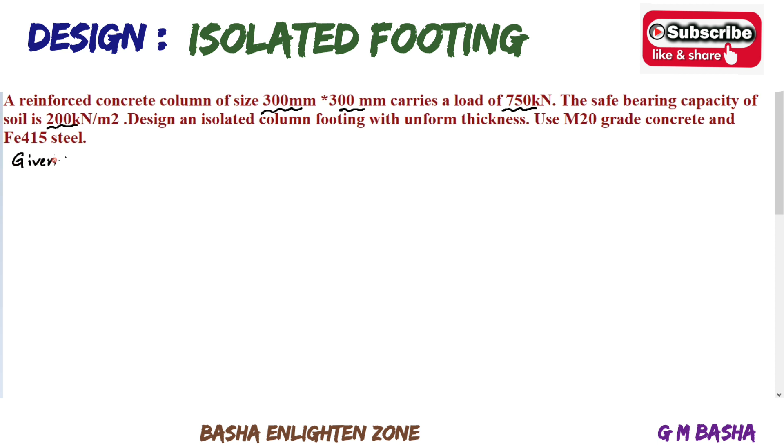Let's write down the given data. They are asking us to design an isolated column footing. What is an isolated footing? It is a footing provided under each column independently. A combined footing, on the other hand, supports two or more columns. But here we are going to design an isolated column footing.

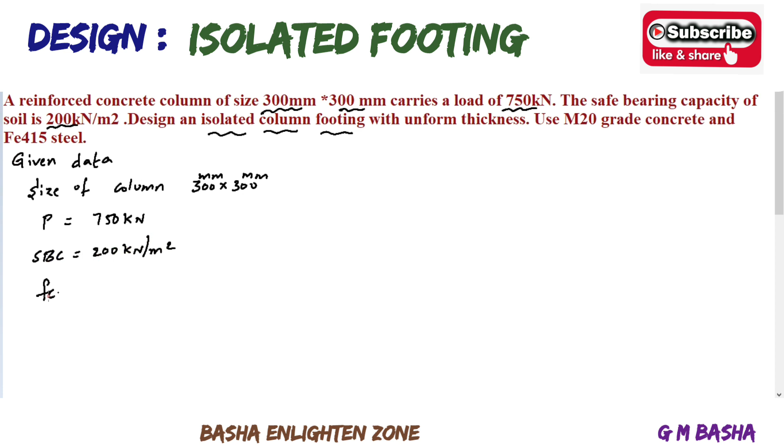So the given data: the size of the column is 300 by 300 mm, both in mm. It carries a load P equal to 750 kilonewton, and SBC of soil equal to 200 kilonewton per meter square. We need to design an isolated footing with given materials: FCK equal to 20 newton per mm square, and Fy equal to 415 steel.

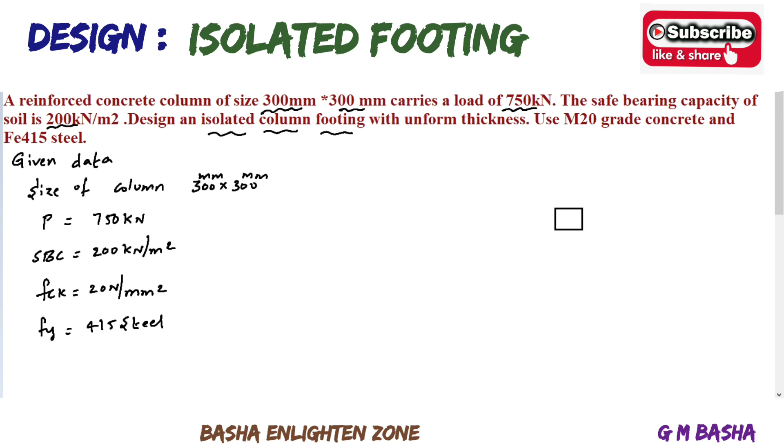So here they have given the size of the column like this. Both sides it will be 300 by 300. Here it will be 300, and here it will be 300. For that we have to design the footing.

Okay, we have to design this footing. So this is the top view. And if I talk about the side view, it will be like this.

So this is the column, this is the size of the footing, but still we don't know the size of the footing. The given data is only for the column, and the column will bear an axial load of around 750 kilonewton. So for that we have to find the size of the footing.

First, let's find the size of the footing. Take down the size of the footing. For finding the size of the footing, first take the self weight of the footing. The load of the column will be given, P equal to 750 kilonewton. Then there is the self weight of this footing.

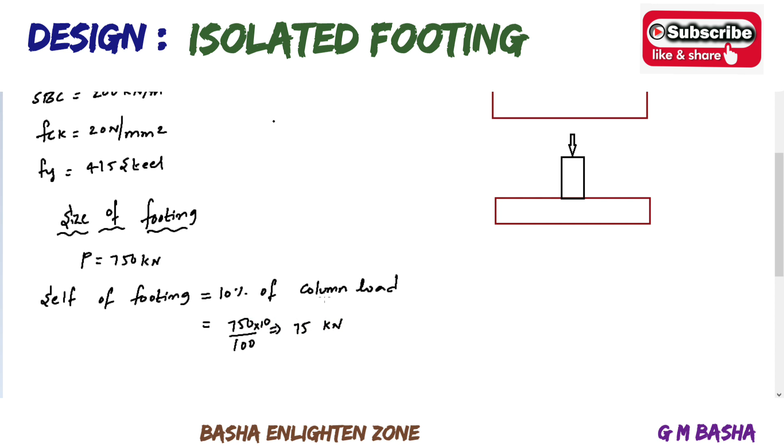So what is the overall load? The column load plus self weight of the footing equals the total load. That will be 750 plus 75, which is 825 kilonewton.

Then find the area of the footing. Area of footing equals total load divided by SBC of soil. That will be 825 divided by SBC of soil, given as 200 kilonewton per meter square. So that equals 4.125 meters square.

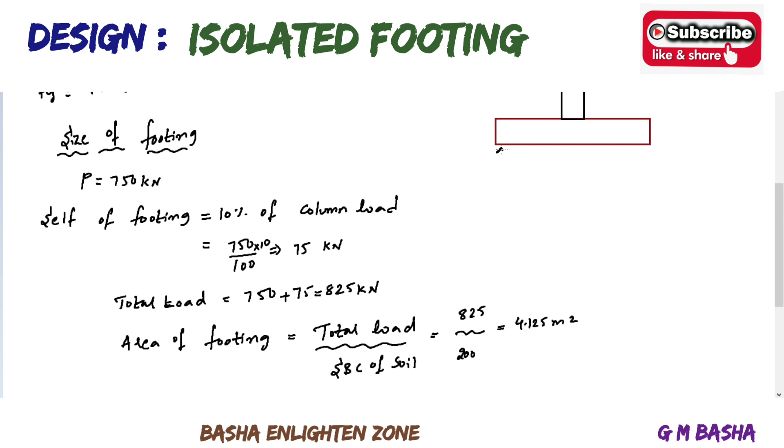Generally the SBC is in terms of upward pressure like this, and it is denoted with some symbol QU, Q, like that.

After finding the area of the footing, since this is in terms of square meters, we divide this footing in terms of length and width. For that, I will take the square root of 4.125. So area of the footing equals L into B, which equals 4.125.

Since both sides we are keeping the same dimensions, it will be around B equal to 2.03. Therefore we adopt approximately 2.1.

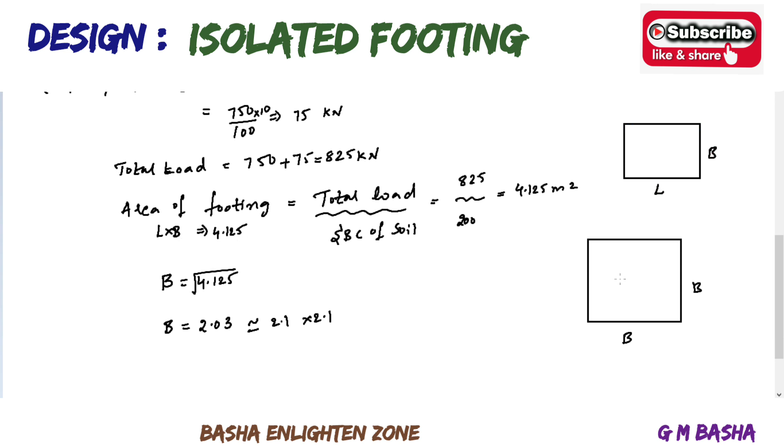So first find the area of the footing. Here it is not mentioned which type of footing you have to design. For example, if they ask you to go for a square footing, then you can choose dimensions as B square equal to the area, both sides same, B into B, like how I am taking here. If it's a rectangular footing, you can take L into B like this. Generally, area equals length into breadth, which is 4.125. Here the column is square, and in the question they mentioned 300 by 300.

It is always convenient to prefer square footing if it is not mentioned in the question. But if it is mentioned in the question, you can go for rectangular footing, changing the dimensions to suit the area. For example, length might be around 1.9 or 1.8 or 2.2 - different length and breadth for a rectangle. The entire procedure remains same, but we change the dimensions according to square or rectangle. Since the question didn't mention anything, for this square column I am preferring square footing only. So I am taking B into B, and the footing size will be 2100 mm on both lengthwise and breadthwise. So our size of footing will be 2100 by 2100.

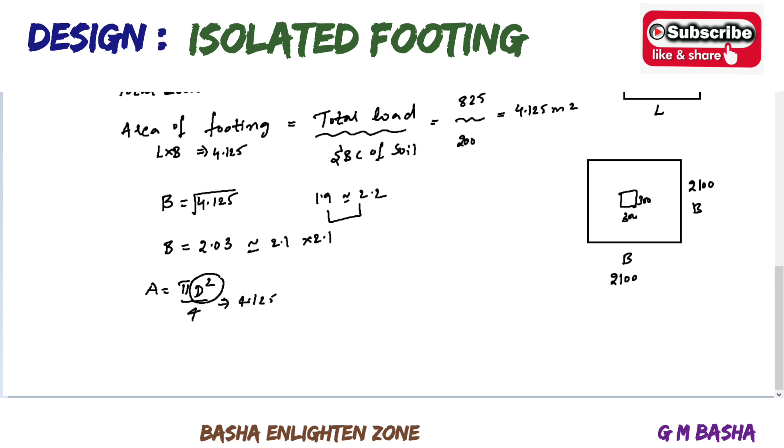Suppose if they are asking about circular footing, then the area of the circular footing will be equal to pi d square by 4. You have to find the diameter based on this footing area, and design the circular footing accordingly. So if it is rectangular, choose length into breadth. If it is square, take B equal to this value. And if it is circular, take pi d square by 4 equal to that value. So here you will get the diameter.

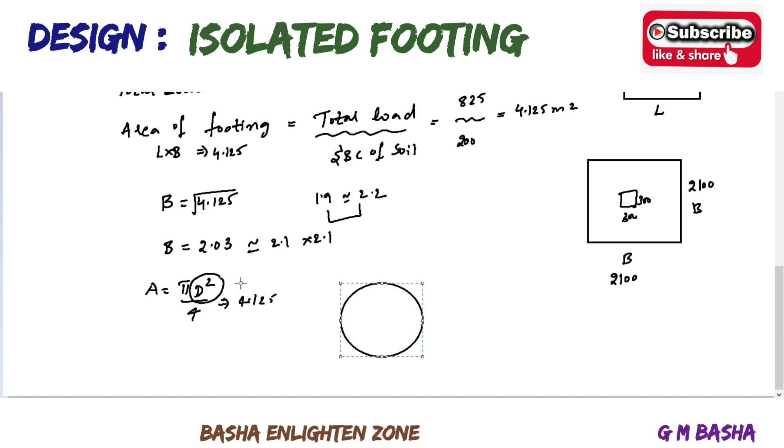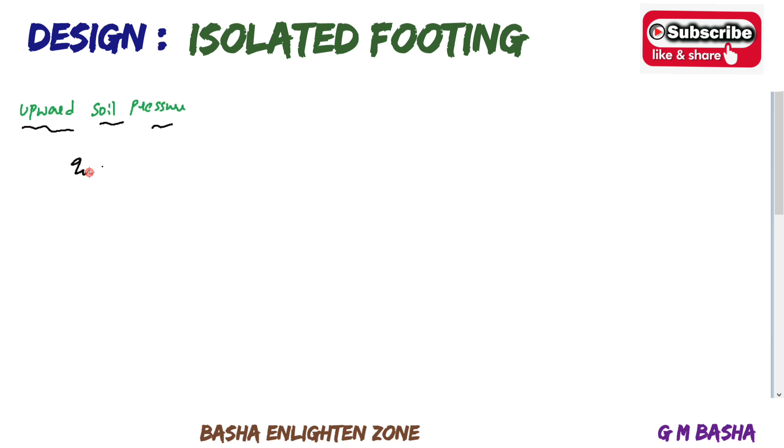Next step is upward soil pressure. What is the formula for upward soil pressure? Soil pressure at ultimate load - we have to find QU equal to PU by area of footing, taken in terms of factored load. If you want factored load, the given load is 750, and factored means add 1.5 times extra. What about area of the footing? We already adopted the size as 2.1 by 2.1 - length into breadth. If you simplify, you get around 255 kilonewton per meter square, which is 0.255 Newton per mm square. This is the upward soil pressure at ultimate load.

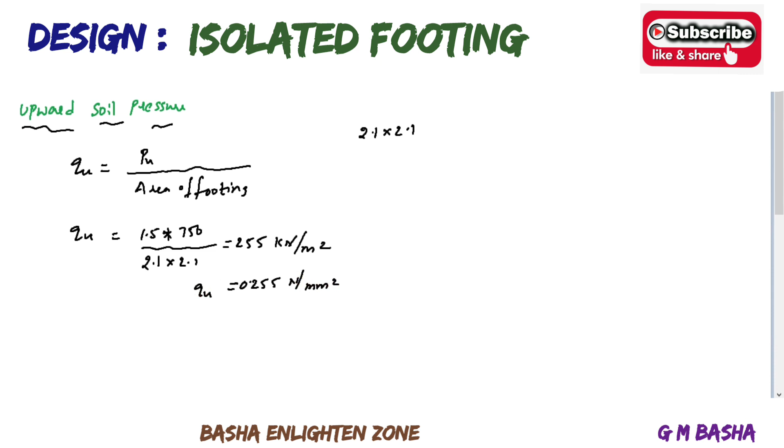Next step is to find the depth of footing from bending moment considerations. What is the formula for finding depth? Generally we choose each time Mu equal to 0.138 fck b into d square. We have to find the required depth based on this formula. For knowing this, we need the Mu value here. So for finding Mu, what is the procedure?

This is the footing. The size of the footing is around 2100 mm lengthwise and breadthwise, which is square footing. The size of the column is 300 by 300 mm. For finding the depth, the critical section is always at the face of the column. The face of the column is this one from here - this is the face of the column on all four sides, equal because of the square column and square footing.

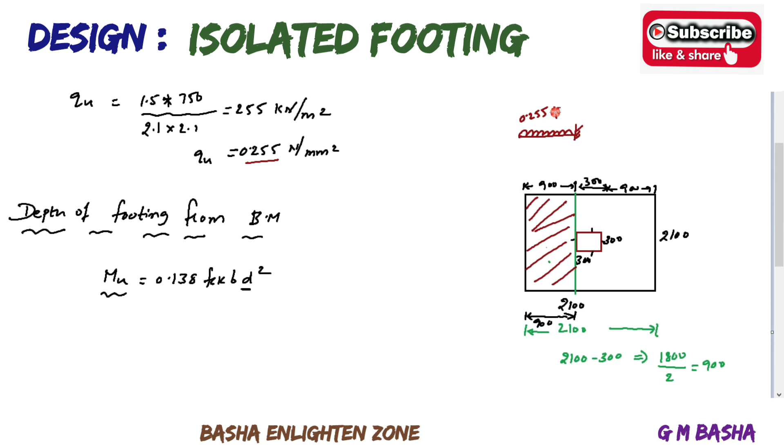So the soil pressure acting here will be QU, that is 0.255, and up to what length it will be in the total span of 2100. So this is the load acting on this end in the shaded area. At what length? It will be around 900.

So what is the formula for finding bending moment? For example, for a simply supported beam, if a UDL is acting, the value will be WL square by 8. But for a cantilever position, if a UDL is acting, the moment will be WL square by 2. What is W here? Soil pressure into its total breadth.

Here L will be 900, divided square by 2. So simplify this one, you will get bending moment will be around 216.88 into 10 to the power of 6 Newton mm.

So what about shear force? We know the condition for shear force also, which is W into L for cantilever.

Okay, here we have to find this depth. For finding the depth, substitute this moment value here, 216.88 into 10 to the power of 6, and remaining value will be equal to 0.138. FCK will be equal to 20.

What is the B value here? In the formula, in place of this B, you can take down capital B, which is the total B value, that is from here to here. So lengthwise we are taking 900, breadthwise taking 2100. So take down this one as the B value, that is 2100.

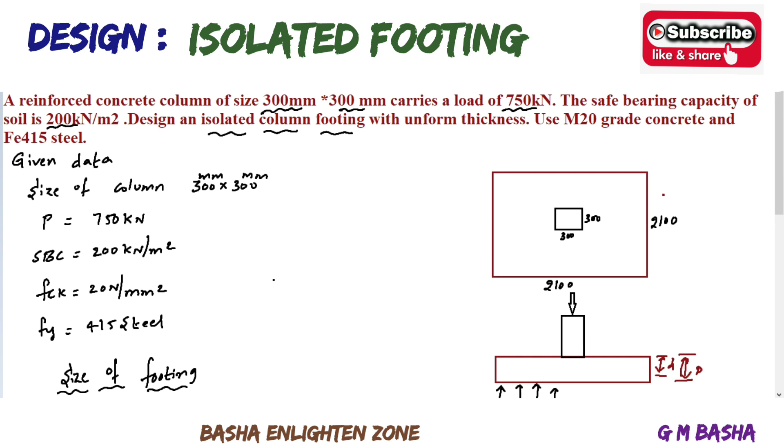So the depth required for footing will be, the obtained value here is 200. One more thing you have to remember is, to resist shear in footings, whatever depth is obtained for bending here, it will be taken as twice. For example, you get depth around 200 mm, means we can take down the value as twice, because depth required to resist shear in footings is much higher than required for bending.

So you have to assume the depth will be twice the bending moment consideration. So each and every time, even for rectangular footings or square footings, if the depth will be some 250 means automatically you can take down twice whatever the depth adopted here, obtained here. So your adopted depth will be equal to 400 mm, which is effective depth here.

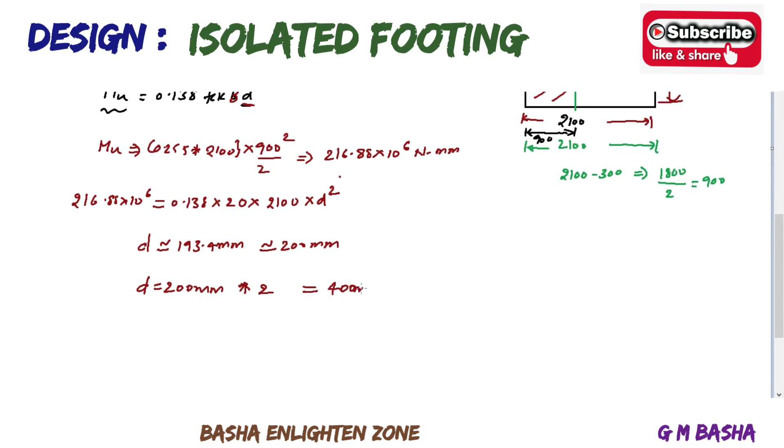Again for overall depth, choose 50 mm effective cover extra and adopt 450 mm as the higher value. So therefore your overall depth will be equal to 450 mm and effective depth will be equal to 400 mm. Then provide the reinforcement for this one. So next step is reinforcement details.

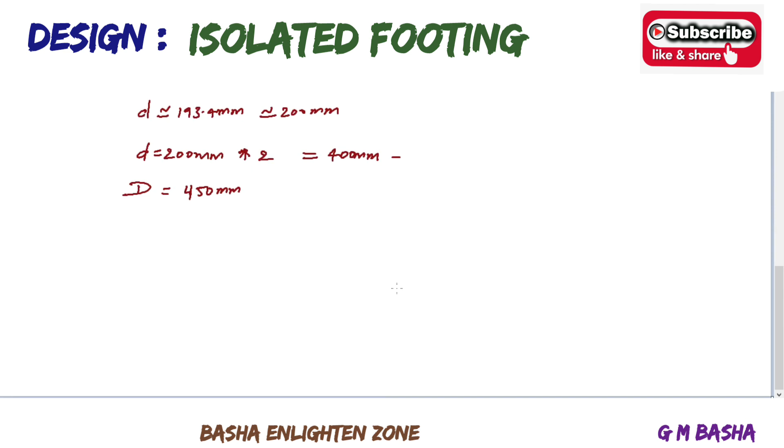So generally for the reinforcement we are using only one formula, which was here, page number 96.

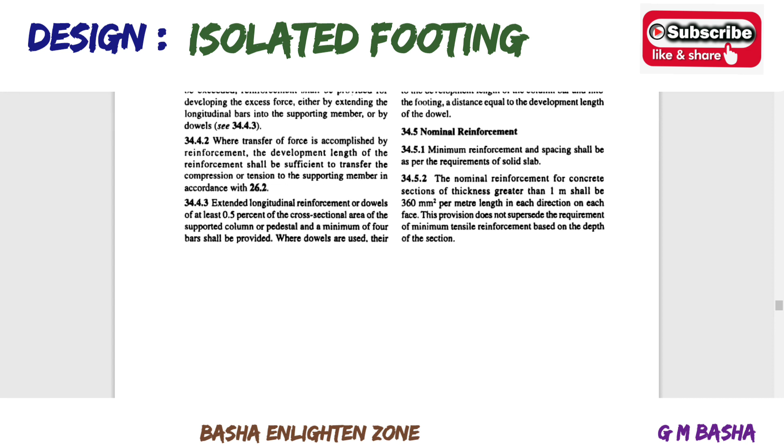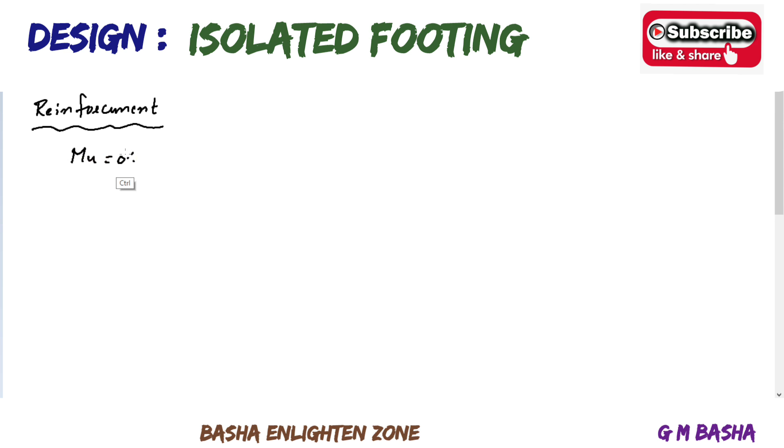Mu will be equal to 0.87 Fy AST D into 1 minus Fy AST by FCK capital B into D. So substitute all the values obtained here: 0.87 into 415 into area of the steel. Depth taken here is 400, and again 1 minus 415 into area of the steel. FCK will be 20, 2100 into effective depth will be equal to 400.

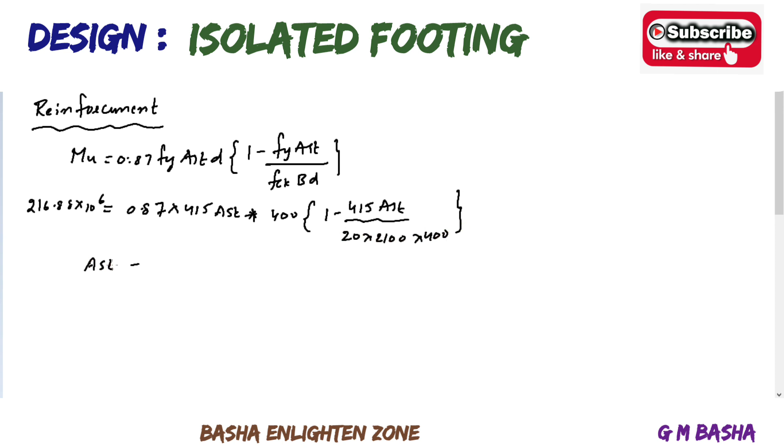So simplify, you will get area of the steel. Just a general procedure for all these things. You will get area of the steel will be 1562 mm square.

So like slabs, we have to provide spacing here also. Spacing will be equal to small AST into B by capital AST. So check the formula. The spacing formula here for footings will be small AST into B by capital AST.

We know the minimum dia bar used for footings will be 12. So I will check with the same dia only. Pi 12 square by 4 into B value will be 2100, divided by this capital AST. So the AST will be 1562, which is obtained here. If you simplify, your spacing value will be 152 mm.

So approximately it will be equal to 150 mm. Adopt the spacing to the lesser rounded value. So here provide 12 dia bars at 150 mm spacing center to center.

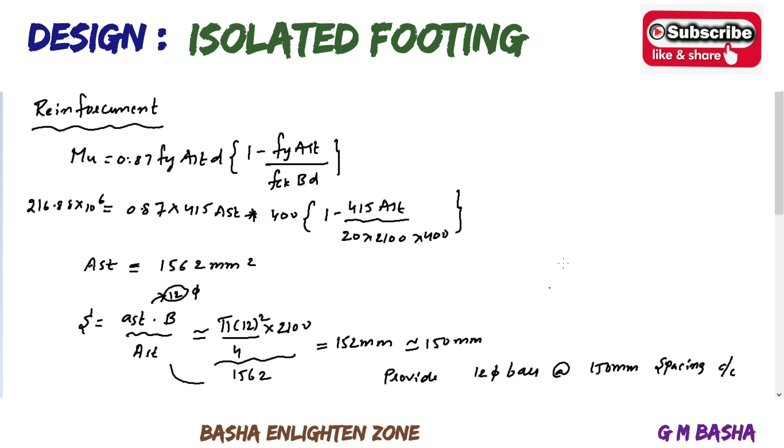So this is the main reinforcement. We have to provide the spacing in both directions. So after finding the reinforcement, check for one-way shear. For footing, we have to check both one-way shear and two-way shear also.

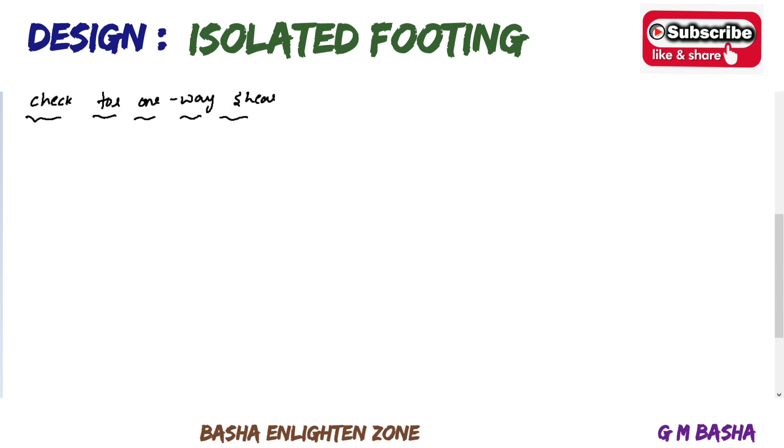So this is the footing and this is the column. We take the critical section for finding the depth at the face of the column, which is at a distance of 900 mm from here to here. The overall length is 2100 mm, so here also it will be 2100 mm.

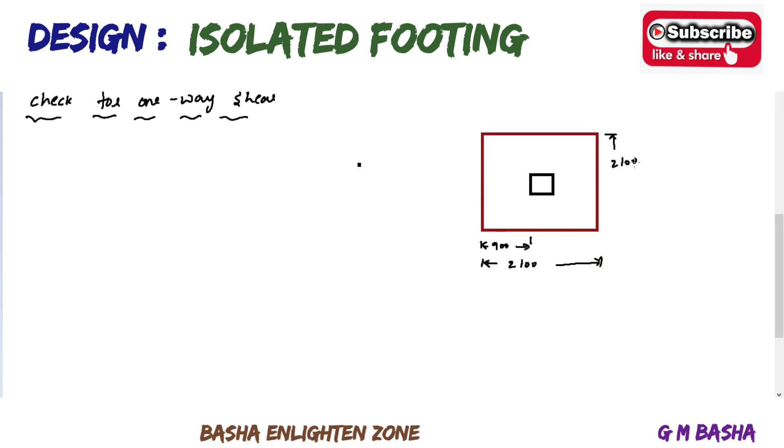So we know all these values. The column will be around 300 by 300 only. But each and every time we have to remember one thing: for finding the critical section to check for one way shear, the critical section is always at a distance of D from the face of the column. What is D here? The D value will be equal to 400 mm, what we adopted. So in this 900, again we have to remove this 400. The remaining value will be 900 minus 400, which is 500. Means the critical section is at a distance of 500 from the face of the column.

Again I will mark with the shaded area here. So always remember this: the critical section is at a distance of D for one way shear. So I will mark with the shaded area. How much is its length? Its length will be around 500.

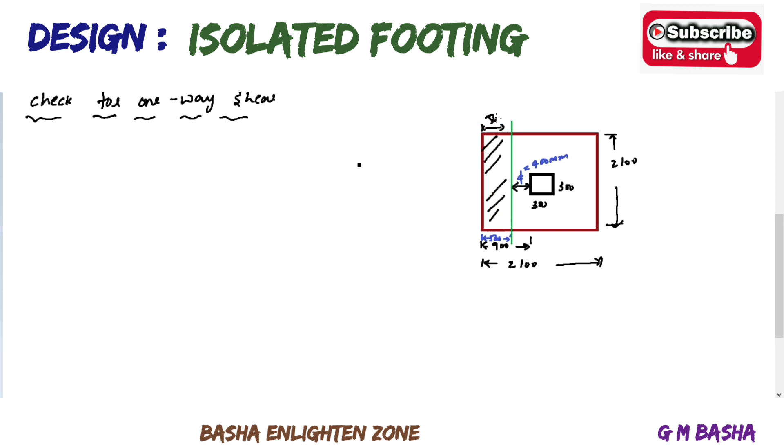Then, if your tau c value is greater than tau v, one way shear is also on the safe side. So first check the tau v value. What is the formula for tau v? We know this formula from the start itself. Tau v will be equal to Vu by capital B into D, generally it will be small b into D. So here capital B will be 2100.

Then what about Vu? Vu will be the shear which is Wu into L. What is Wu here? Already we know Wu will be equal to 0.255 into its overall length, breadth 2100. And L is here the critical section which is acting, 500. So I am telling like this: this is Wu into 2100, and this distance is 500. That is WL is equal to, sorry, this value ends up to here, W into L. So the value will be 267750 newtons. After obtaining this Vu, check with the formula.

That one will be equal to 267750 by capital B value will be 2100, into small d value will be 400. So it will be 0.318 Newton per mm square. So your tau v value will be equal to 0.318 Newton per mm square.

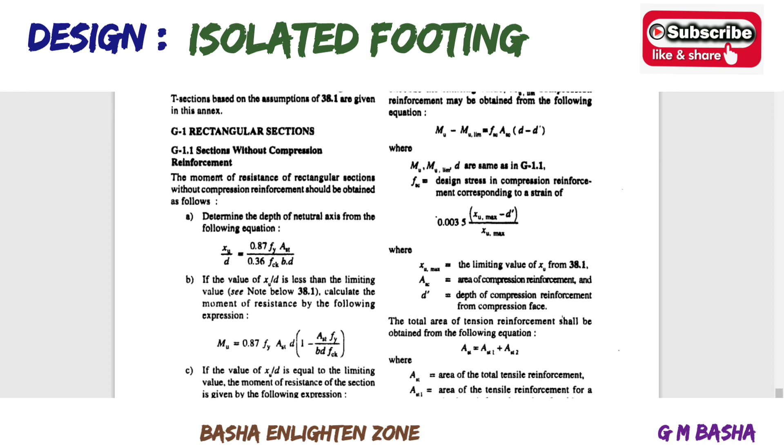Then for finding this tau c, we know the condition. First we have to find the percentage. Where will it be? It will be in page number 72. So we know the design strength of concrete, which was in page number 73. Design shear strength of concrete tau c value.

PT will be equal to 100 AST by B into D. Here in place of B, you can take spacing S into D. So just small modifications in the formula, please remember that one: 100 AST by S into D, where D is small d here.

So area of 100 steel, we are taking pi into 12 square by 4. We are adopting this much dia. Spacing will be around 150. Effective depth will be 400. So you will get around 0.2%.

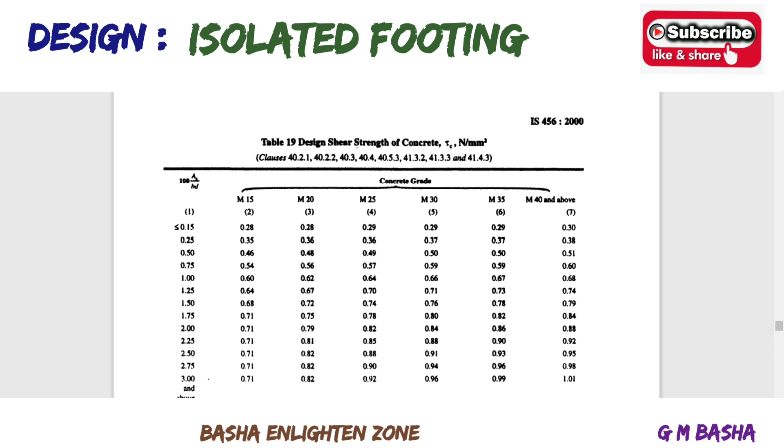See here in the table, check once where your 0.2 lies. So your value lies between 0.15 and 0.25, so exactly middle value, 0.20 value. See here, 0.15 and 0.25, we want the middle value, that is 0.2.

So for M20 grade concrete, one value will be 0.28 and 0.36. How many digits here? The difference is 0.08. So I will take exactly half of that difference, means 0.04 is the half distance. So I will take 0.32 as the correct middle value for 0.2.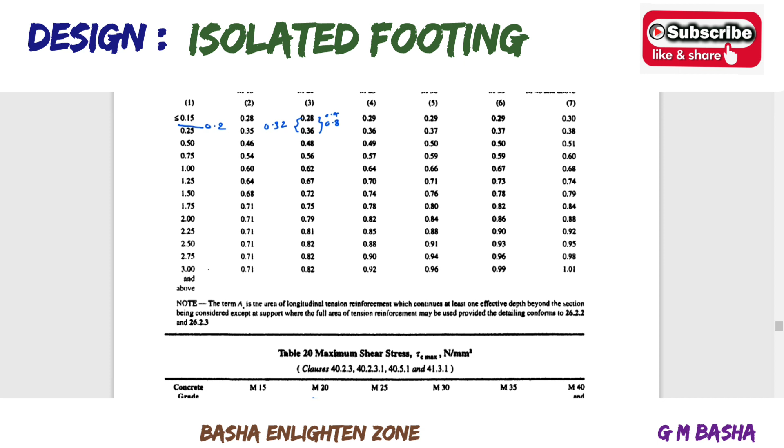Why? Because we want exactly half of the value. So if you want 0.23, 0.21, or 0.16, 0.17, we will go for interpolation. There is no other procedure for finding this. Already I explained in so many videos how to calculate interpolation, but here it's very easy since 0.2 is exactly the middle term between these two, so I will directly choose 0.32 as our permissible shear stress.

So tau c will be equal to 0.32 Newton per mm square. If you observe, this tau c of 0.32 is greater than tau v, which is equal to 0.318 Newton per mm square. So here, if tau c is greater than tau v, your shear will be safe. One way shear will be safe, which is safe inside.

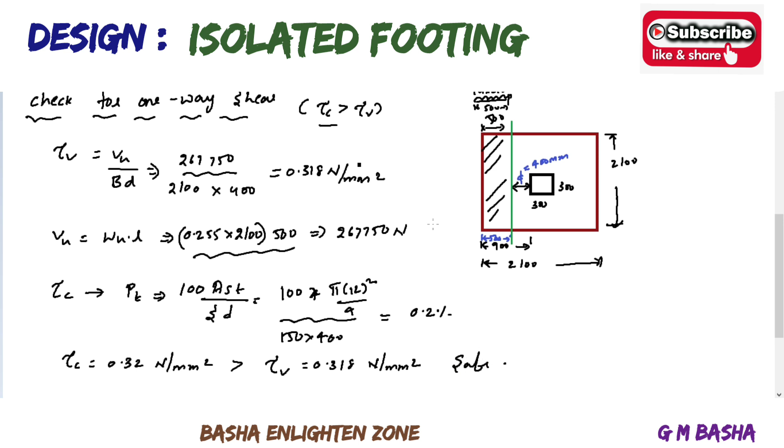Then similarly, go for two-way shear. For one-way shear, we took from one side at a distance of d from the face of the column. But for two-way shear, it will be slightly different. So this is the footing, so again you can take down all the dimensions. Again this is the column, around 300 by 300 mm.

But for finding two-way shear, the critical section is at a distance of d by 2 from all faces of the column. So see here, d by 2 from the face of the column, like this, all faces. This side also d by 2, this side also d by 2, so each and every face it will be at a distance of d by 2.

So here d value will be 400, d by 2 means 200. So here also 200, here also 200, here also 200. So I will check the values, it will be like this.

See here, so d by 2 from this face, similarly d by 2 from this face, similarly d by 2 from this face, similarly d by 2 from this face.

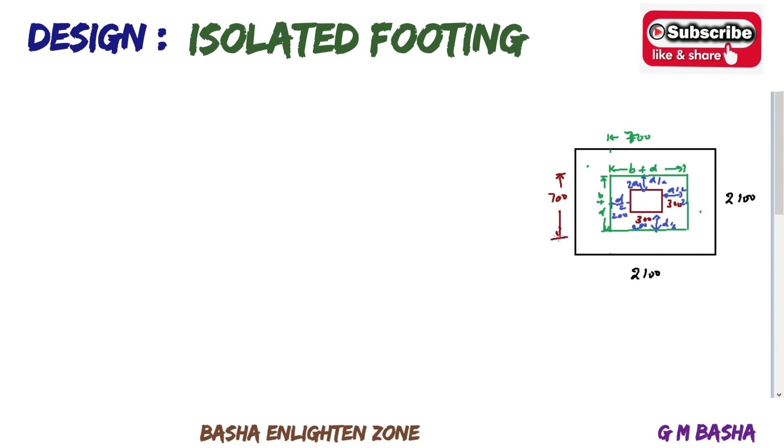Then this entire area is the critical section here. I will mark it with shaded lines like this. So always remember, check for two-way shear. Check for two-way shear.

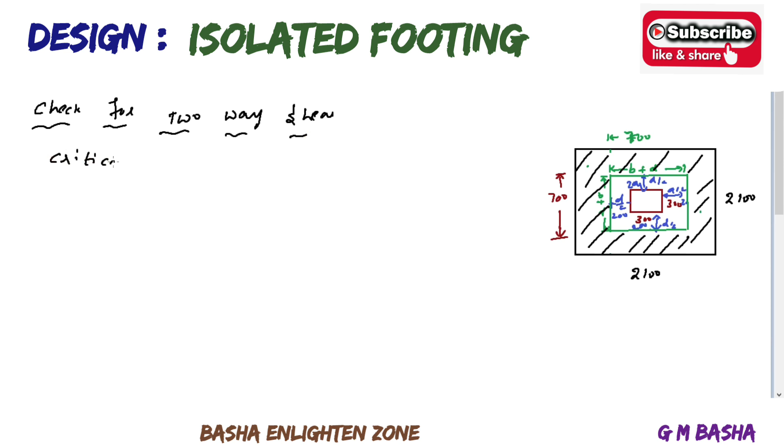So you remember one point here: the critical section is at a distance of d by 2 from the face of the column. I have shown all the dimensions of how it affects. D by 2 means overall 700 area. So what is the remaining shaded area here?

If you remove all this area, taking 700 four times, you get the overall perimeter: 700 plus 700 plus 700 plus 700, this side 700, this side 700, that is the perimeter. So the perimeter of that critical section will be equal to 4 times 700, which is 2800. So we are seeing this from the top view. For example, this is only the top view, and what about its depth? We know the depth here, so it will be like this.

So the depth is around, the d value taken from here to here will be 450, and the column will be here, 300, and this perimeter of the section will be around the column dimension also, which is equal to the internal one. So take down approximately with that dimensions only.

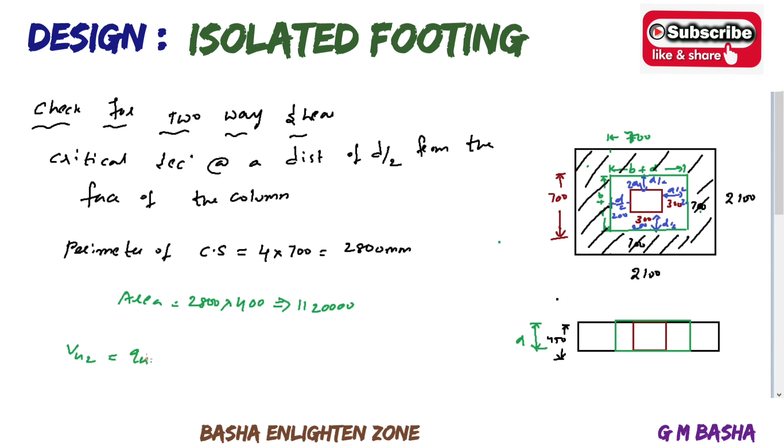Then the next step is for two-way shear, finding the VU2 value. So the formula will be QU into area of the shaded portion. So what is here, area of the shaded portion? See here, this total area, that is in the overall 2100. Every side we are removing 700.

So how much will it be? In the overall side, that means 2100 by 2100 minus 700 by 700. So you will get the area of this shaded portion. So for that, the QU value will be equal to 0.255 into area of the shaded portion, which will be equal to 2100.

So this is the overall area. I am removing the shaded portion 700 by 700. Okay, then if you simplify, you will get the VU2 value, that will be around 999.6 into 10 to the power of 3 in terms of Newton.

Then the two-way shear stress formula will be, so please remember the formulas in the footing. We know that stress will be equal to force by area, that is 996, that is VU2 here, 999.6 into 10 to the power of 3.

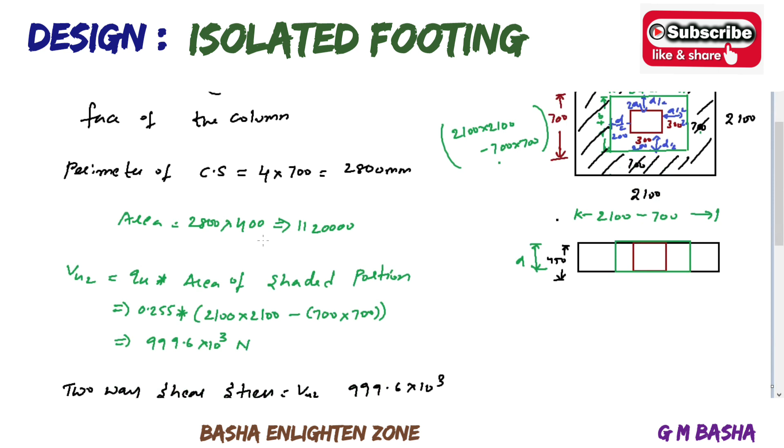So what about its area? So its area is around, so we find here area of the critical section will be equal to this one, 2800 by 400, that is 1,120,000. So if you simplify this one, you will get 0.89 Newton per mm square.

Then check with the permissible punching stress. So permissible punching stress, all these formulas are there in the code book also. So your tau p value will be equal to 0.25 square root of FCK. Just to check with the code book once. So simplify this one, 0.25 square root of 20, it will be 1.12 Newton per mm square.

So here if you observe this one, this tau p will be greater than tau v value, which is 0.89 Newton per mm square. So if your tau p is greater than tau v in two-way shear, so your two-way shear is also safe here.

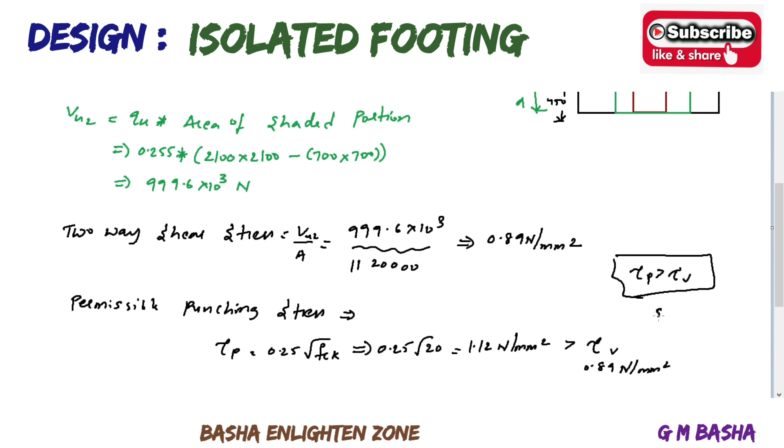And again in the one-way shear, what is the condition? Your tau c value will be greater than tau v, then your one-way shear will be safe. So please remember, it will be acting at a distance of d from one face of the column, but here it will be acting at a distance of d by 2 from both faces of the columns.

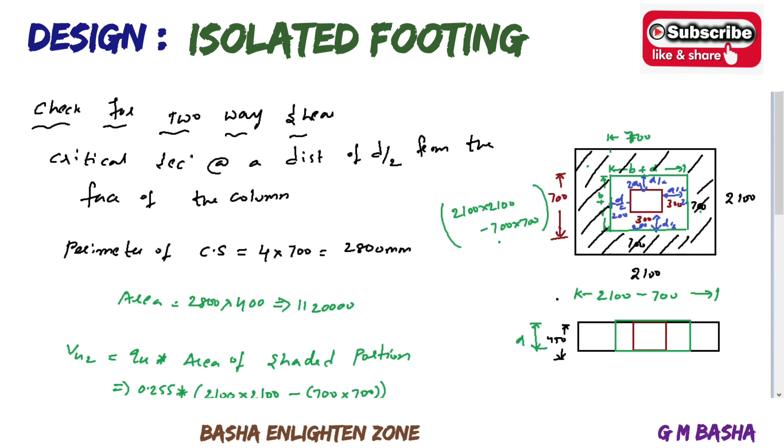First find the perimeter of the section and then find the critical section area. Then check for bond length. So already I told you how we have to check the bond length for the cantilever beam. So here also the footing is designed as a cantilever with reinforcement subjected to design strength of the column face.

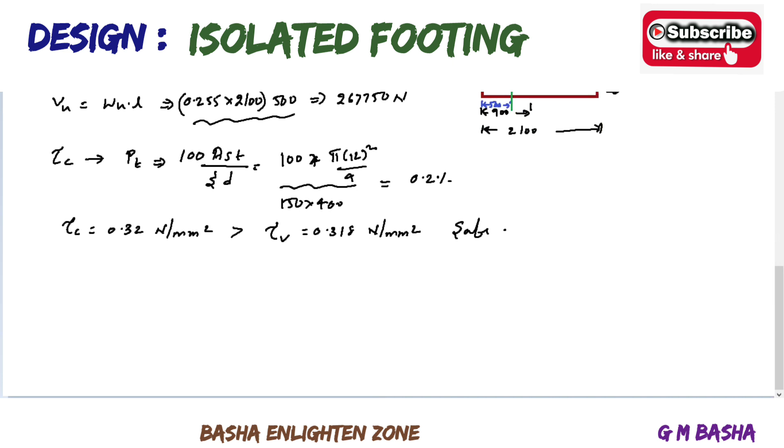While checking with the one-way shear, see here very clearly, it will be designed like a cantilever. Therefore, we have to check the bond length also for the footings. So what is the formula? As per IS 456, the page number will be around 42. I will show once the formula, where it will be.

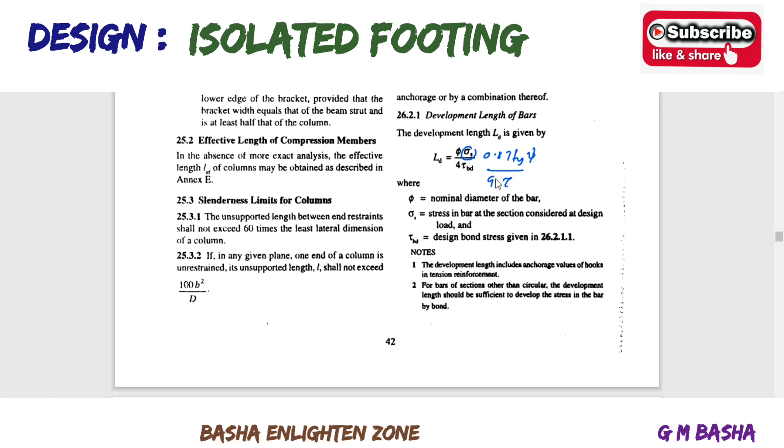See here, LD development length will be equal to dia sigma s by 4 times of tau BD. So we know sigma is equal to 0.87 Fy dia by 4 times of tau BD.

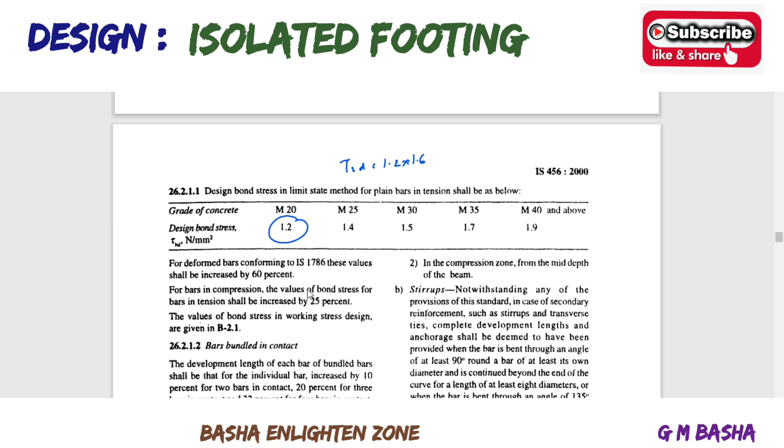For deformed bars conforming to IS 1786, these values shall be increased by 60%. For M20 grade concrete, tau BD will be equal to 1.2, increased by 60%, so tau BD equals 1.2 into 1.6. So totally in the formula we take 0.87, Fy equal to 415, diameter equal to 12mm bar, and 4 times tau BD which is 1.2 into 1.6. If you simplify, you get around 564 mm.

Okay, so that is the bond stress calculation. It will be around 564 mm here.

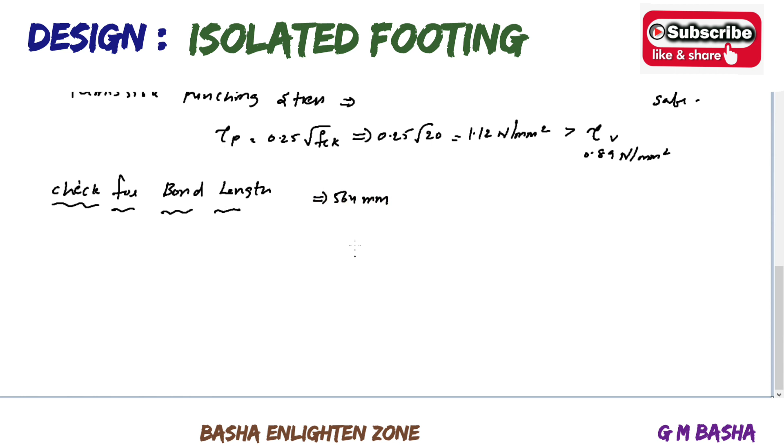From the face of the column, for one-way shear, for bending moment calculations, minimum depth required for bending moment considerations from the face of the column will be taken as 900 mm. But what is the development length required? It will be 564 only. So the face of the column depth is higher than the development length, 900 greater than 564, so it is also safe.

Okay, then move to the next step, which is bearing pressure. I will go with the next step, that is bearing pressure. Check for bearing pressure.

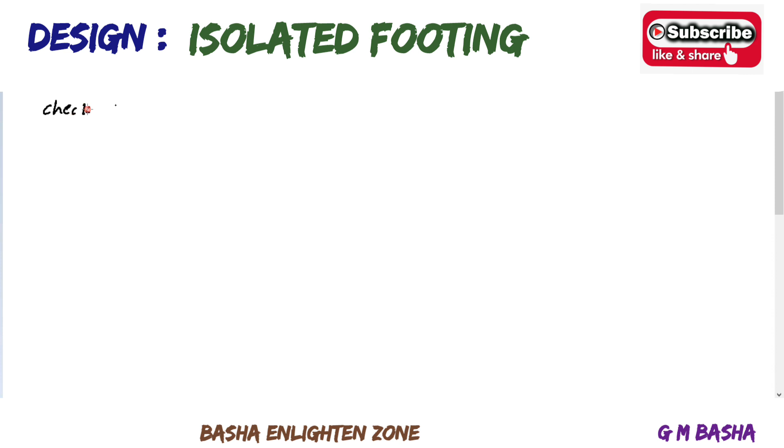Before going to the bearing pressure, first see here, the compressive stress in concrete at the base of the column is transferred by bearing to the top of the support footing. See here, I will show the image. This is the column and this is the footing.

So you can check the bearing pressure here. This is A1 of the column. The total area is taken like this: the column width plus up to slope 1:2, distributed. The load from the column is distributed to the footing from both left and right sides. This is in 2D view, and again you can take this view width wise, it will be the same. So here also we can observe the column like this, showing in 3D view.

So A2 will be this part and A1 will be this part. The overall area is 2D plus B plus 2D. The compressive stress in concrete at the base of the column is transferred by bearing to the top of the supporting footing. The bearing pressure on the loaded area shall not exceed the permissible bearing stress.

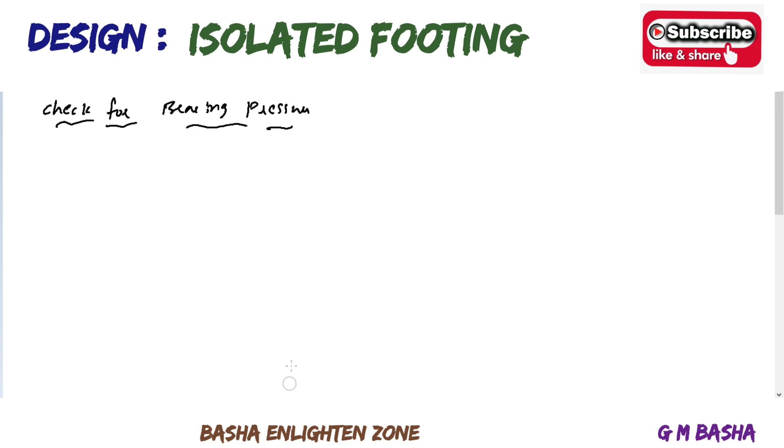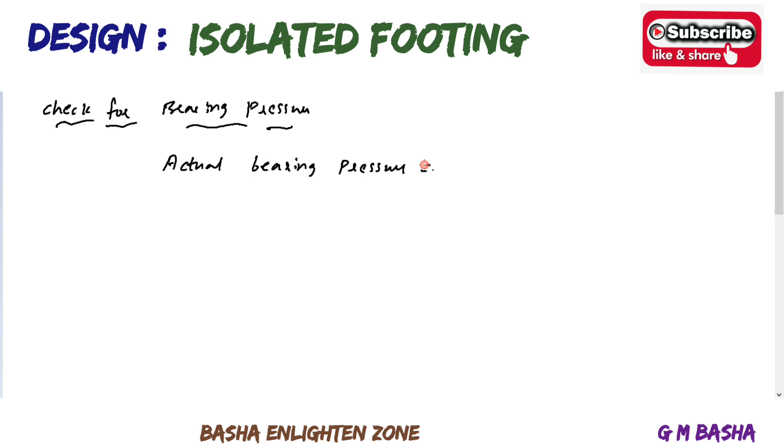So here, actual bearing pressure equal to ultimate load by area of column, less than permissible value. I have seen all these statements in the code book. I will check with that code also, which is on page number 62.

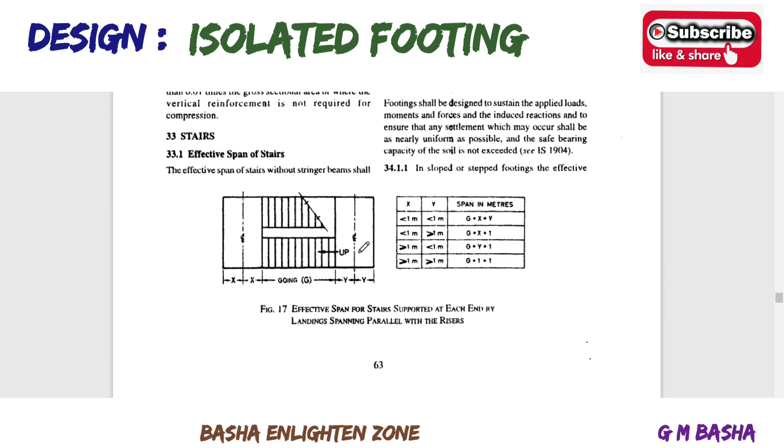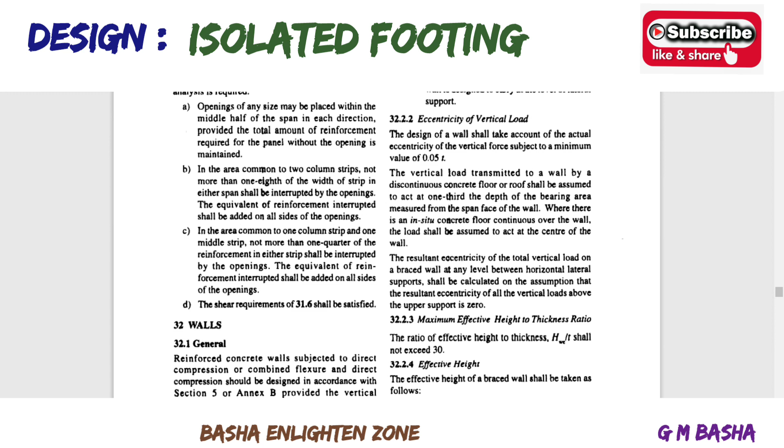See here, page number 65. The compressive stress in concrete at the base of a column or pedestal shall be considered as being transferred by bearing to the top of the supporting pedestal or footing. The bearing pressure on the loaded area shall not exceed the permissible bearing stress in direct compression multiplied by a value equal to square root of A1 by A2, but not greater than 2. Here A1 is the supporting area for bearing of footing, A2 is the loaded area at the column base. This is A2 and this is A1. First check with that value. This is in the code book, page number 65, IS 456 2000.

So I will continue the problem here. You people know the diagram. What is the width of the dispersion load area? That is the total area taken from here to here: 2D plus B plus 2D.

So here we know the column will be 300 mm, and this B value will be equal to 300, and 2D where D value is taken as 400, so that will be 800. Here also it will be 800. Overall 16, 17, 18, 1900. So 800 plus just 16, 17, 18, 19 - overall the length will be 1900.

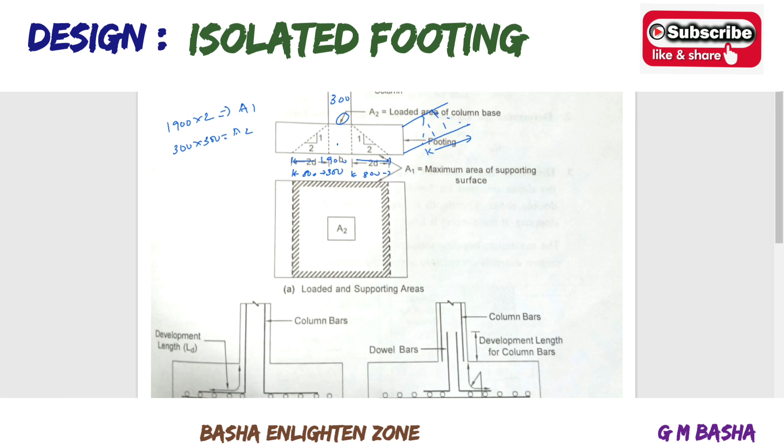So how much will you get this one? You can simplify like this, I will take in terms of meter. A1 will be equal to 1.9 by 1.9, which is 1900 by 1900, so it will be 3.61 meter square. A2 will be equal to 0.3 by 0.3, in terms of meter square.

It will be 0.09 meter square. So we know the condition square root of A1 by A2. So how much will you get this one? Square root of 3.61 by 0.09, it will be 6.33.

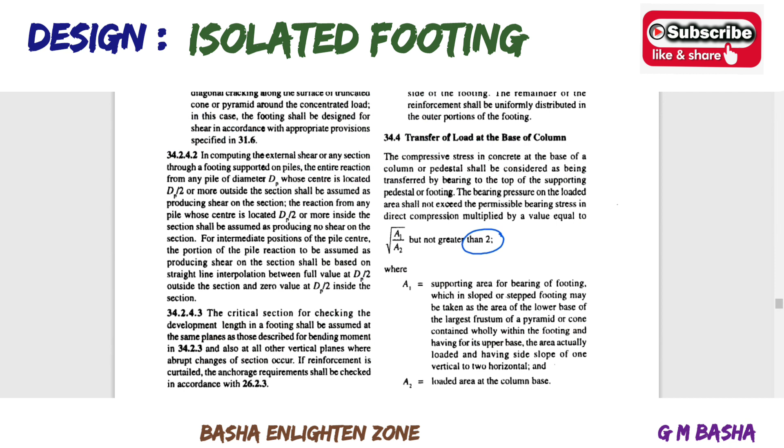But what is given in the code? In our code they clearly mention it should not be greater than 2. In that case what we will do, whatever value obtained here, it will be restricted to 2 only. So approximately we are taking this value as 2.

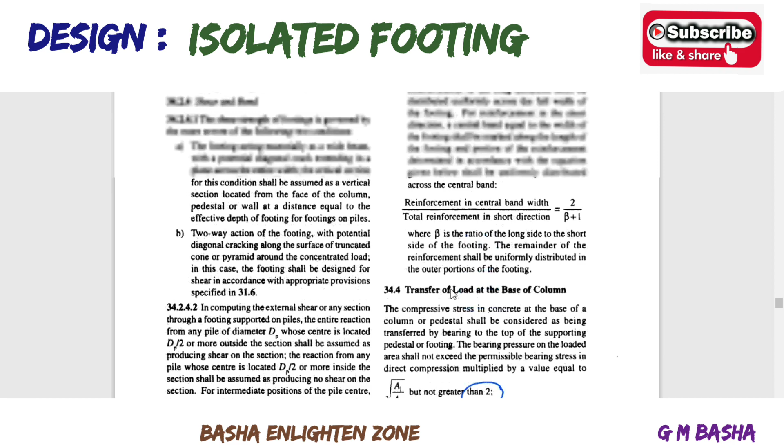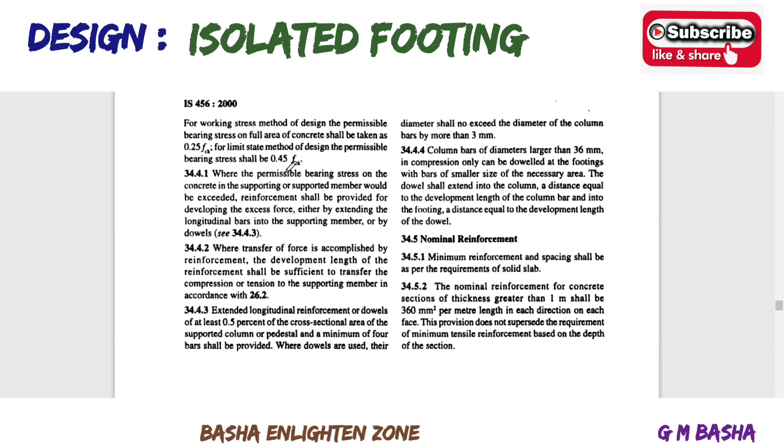Then what is the formula as per IS 456 value? So it will be 0.45 FCK along with the permissible bearing stress. The formula will be this one, that will be equal to the permissible bearing stress. The permissible bearing stress will be equal to 0.45 FCK square root of A1 by A2.

So this A1 by A2 will be restricted to 2 here. Then what about 0.45 into FCK? So you can check with that value, that is 0.45 into FCK will be 20 into this 2 value. So I will write down here clearly 0.45 into 20 into 2. So the value will be around 18 Newton per mm square.

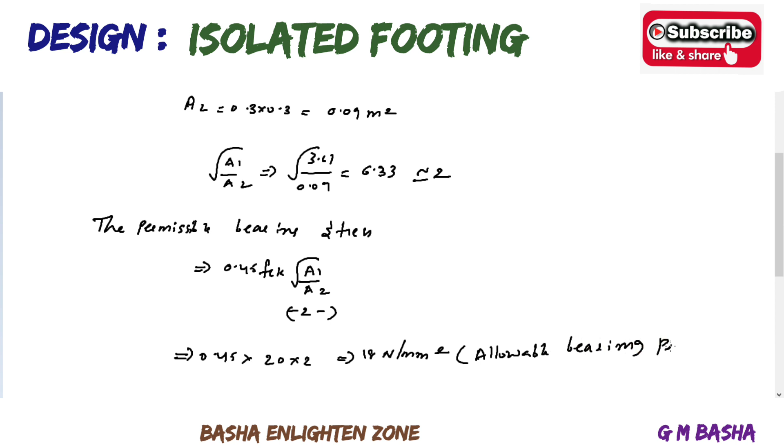So this is actually the allowable bearing pressure, means permissible allowable bearing pressure, that is 18 Newton per mm square.

Then check the actual bearing pressure. What is the actual bearing pressure? We know the general formula, pressure will be equal to load by area. What is ultimate load we are taking for the calculation? 1125 into 10 to the power of 3. Area of the column will be 300 by 300. It will be around 12.5 Newton per mm square.

So based on our design calculation, the footing allowable or permissible bearing pressure will be 18, but actual bearing pressure on the footing will be 12.5. Therefore allowable bearing pressure will be greater. So hence our design is also safe, because actual bearing pressure will be this much, but the allowance is higher, therefore it is safe only. So bearing pressure is also safe. So like this you have to check the bearing pressure also.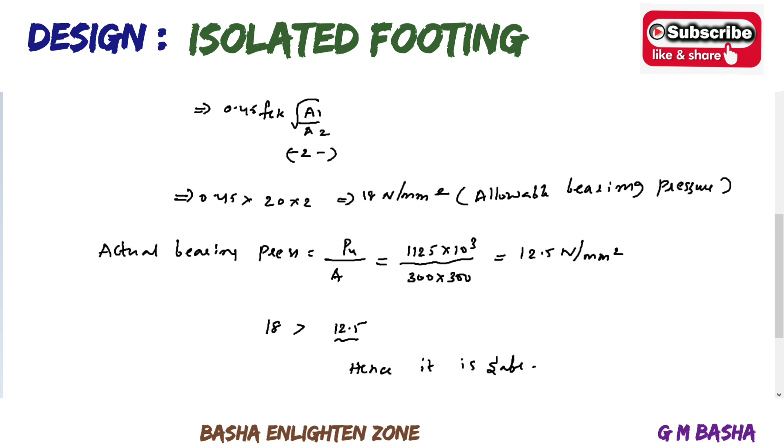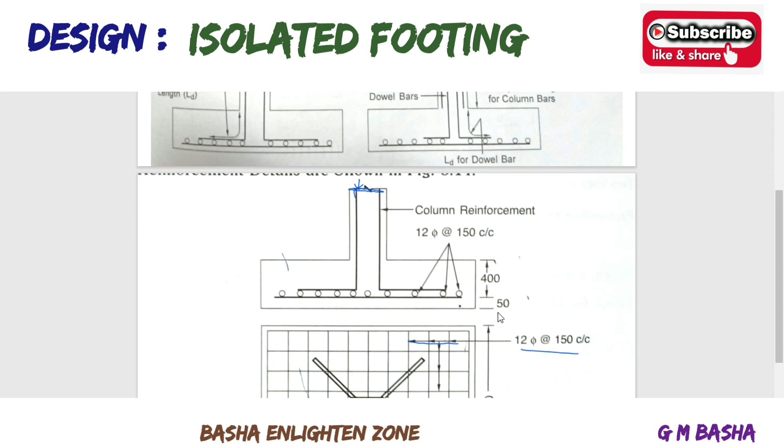So this column, stirrups and the column dowel bars. So you are observing these dowel bars for providing stirrups, and these bendings which are provided for the development length. So all these things will be observed here. The column cranked here, bending value, so the column will be bent here like this. The reinforcement of the columns bends like this. So we are observing that one.

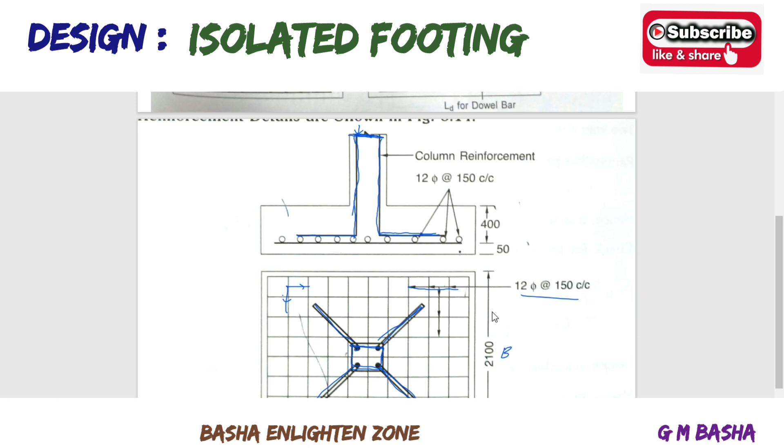So these are the reinforcement provided, that is 12mm bar at a spacing of 150mm center to center. And here if you see from this view, the straight bars will be appearing round like this, and these bars will be the straight bar. So this is the detailing of the reinforcement. Comparing to other detailing, it will be very simple. So please check once.